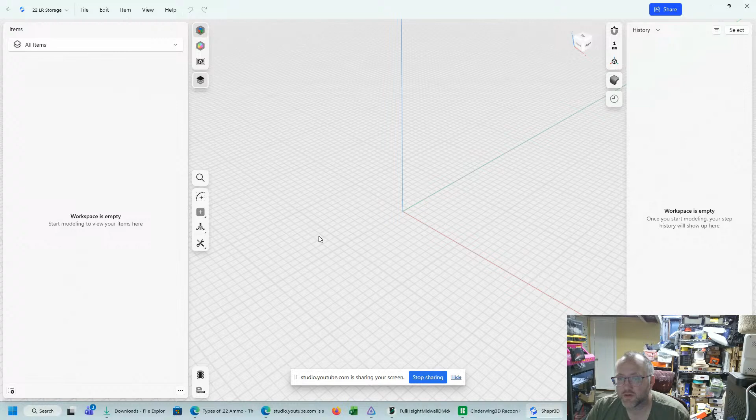Storage. Okay, so first things first, we want to be on the top. I tend to be on the top when I work on things like this. So I have an X and Y right here. Do a sketch. We want to do a rectangle, because why not? 40 by, let's do 40 by 40.

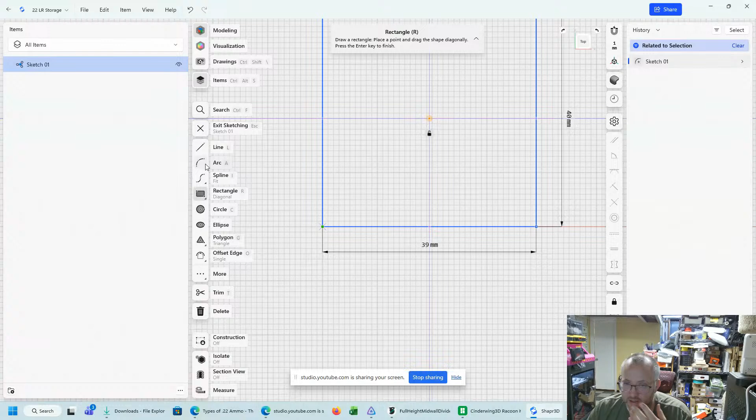Nice little square. Now, because we want to have this work for a case, right, we need to put some additional widths here. That way we can set the extrusion at different heights. So I did a 40 by 40, but it's not going to be a 40 by 40, right? So, come on, 40... 40. Okay, see if you get that out.

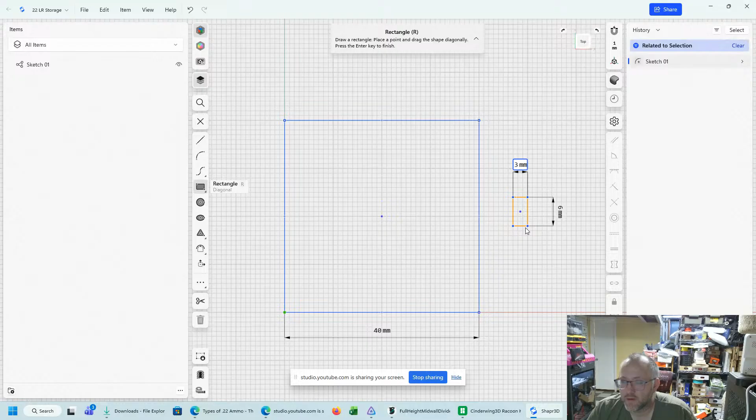So what we're going to do is we're going to then offset this, because that is going to make it easier for what we're doing. So offset edge, right? We're going to select the edge here, and we're going to do about 3 millimeter. And we offset this edge, and that's going to be 3 millimeter. And offset this edge, like that, 3 millimeter. Right, now we've got this done.

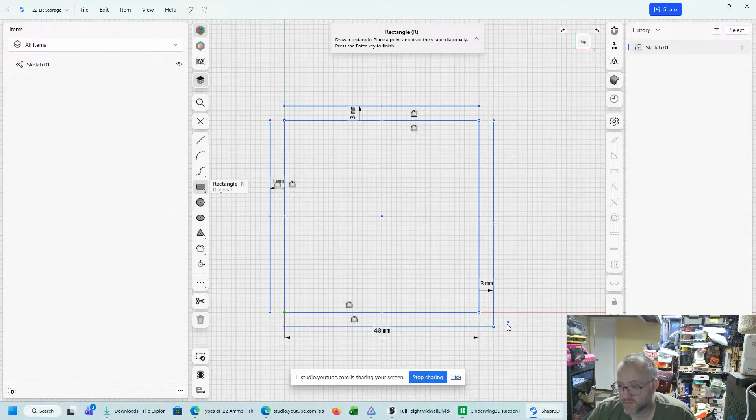Now I could either stretch this and connect them, or I could just make another rectangle. To be honest, that's probably the easiest thing to do, is just do it in a rectangle. So now we have a box within a box. So we can 3 millimeter box, pretty sturdy, have a flat, and then we can extrude it.

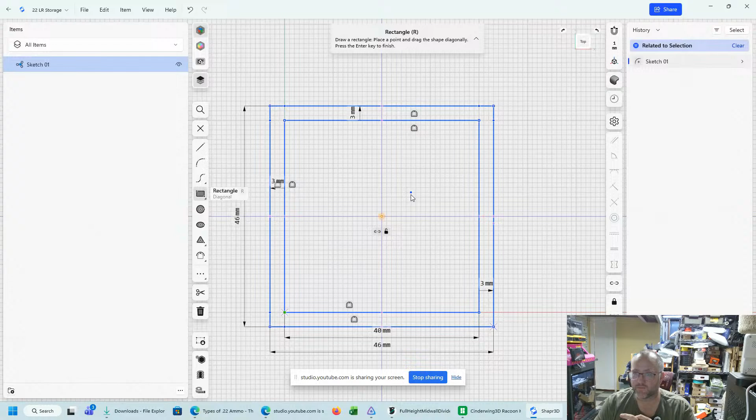Now, because we want this to be a box within a box, right, this is where it gets fun. We probably want to have some sort of box inside that. We want to offset that edge by 1. Okay, so now we have the thicknesses here. Why is this important? Well, now we can make the box here.

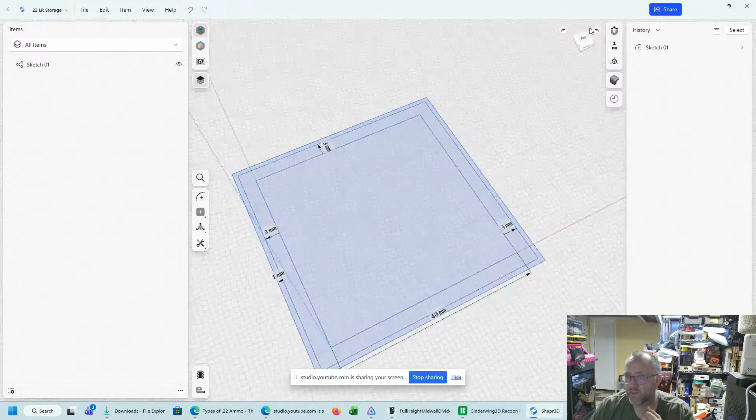We're going to lift this one up, say 3. Now we're going to lift this up, say, I don't know — how tall are the rounds again? Go back to our research here. The overall length is... an inch should work fine.

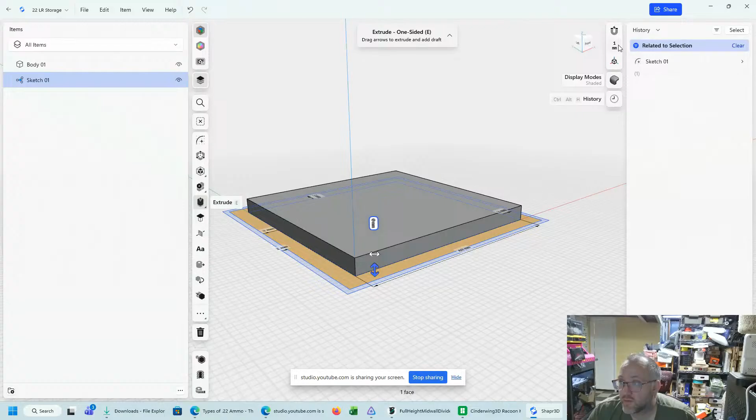So we can switch our measurements to inch, make it a little easier. And we go 0.75. Alright, you see that now? And now we have this other one where we can go 2 inches.

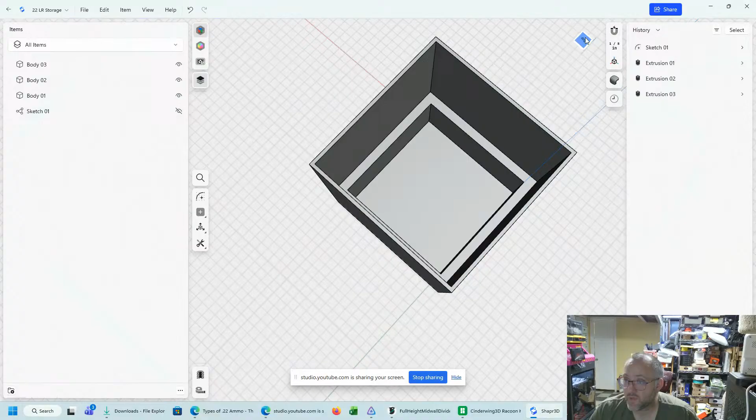So now, see what we got going on here? Now we have a case within a case, right? Isn't that nice? So we're going to turn these off because we want to see the sketch.

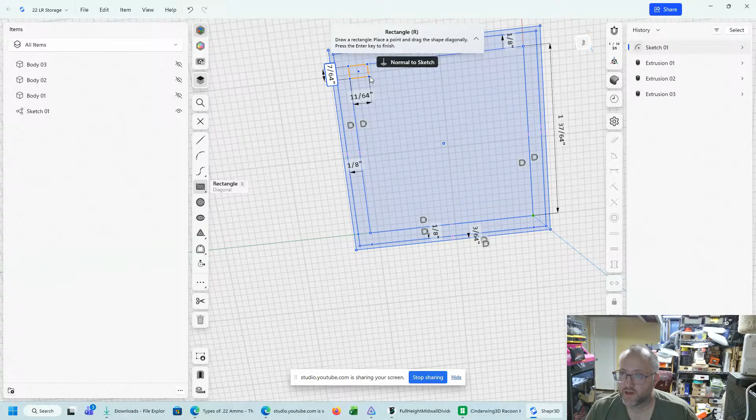So now we want squares, because these are squares and they're 0.22 inch, right? But you got to keep in mind you need a thickness. So if I do here and I do something like this, but I want to see this in decimals, okay, so that's not big enough, right?

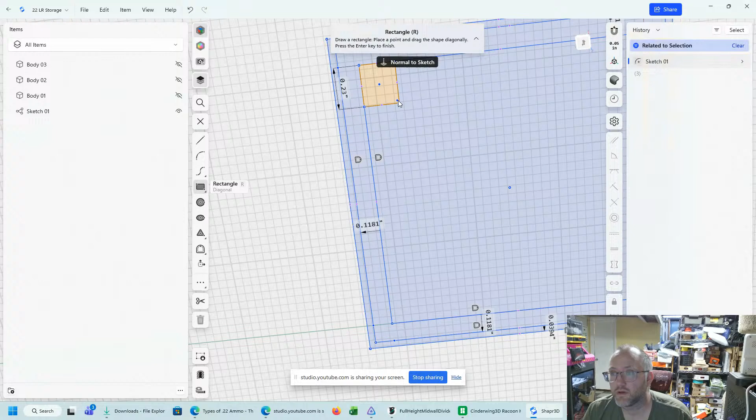So this has to be about 0.23. Why do we say that? Because that's how thick we need it for it to be anything. So because we actually need it a little wider, let's say 0.26, so we got 0.03 for thickness of that wall.

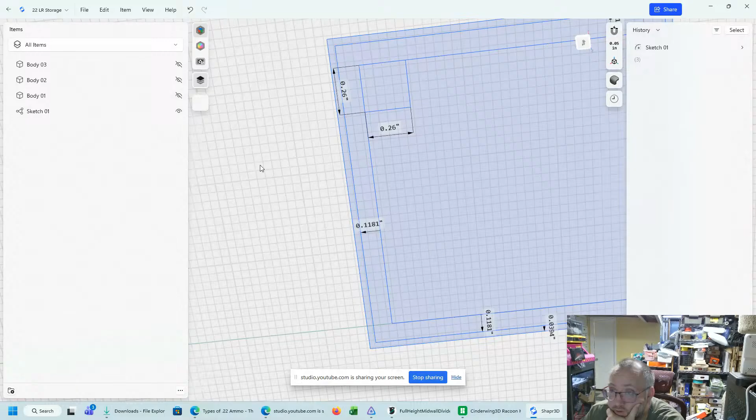Okay, so now we're going to do that offset command again. We have commanded here, you can see, we're going to do a little offset. Nope, not offset face, we want to offset the lines. So we go back to offset edge. We check that we wanted to chain, and we want to do this.

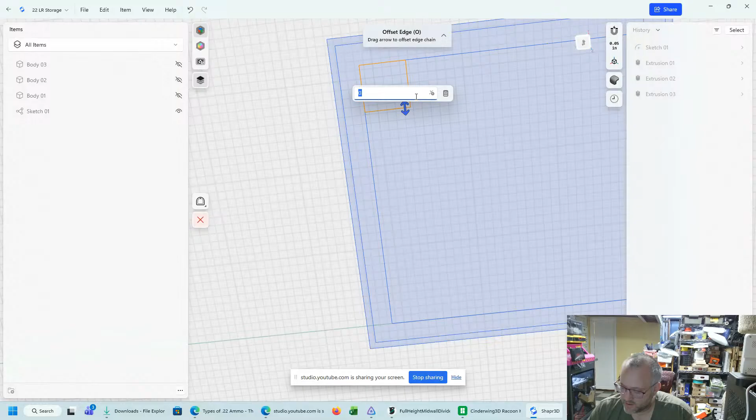So we want to go inside 0.03. Oh no, negative, it has to be negative. Negative 0.03. Now we have a box in a box, which is great.

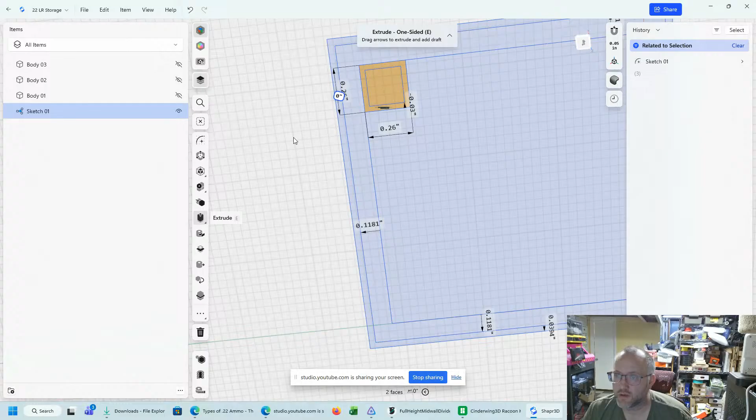Because now we've got this shape, and we got this shape, and we're going to go ahead and we're going to lift this. Okay, so we already have this base here.

So we want that to be, switch this back to millimeters because I'm just a millimeter person. We want that to be about 4 millimeters. Switch this back to inches because we have the dimensions in inches. If the overall length is 0.695, right?

Well, you don't want to have to pull everything out. So you're looking at being able to pull this sucker up, so we can make shorts or we can make long. I'm doing a rifle, so I want the 88.

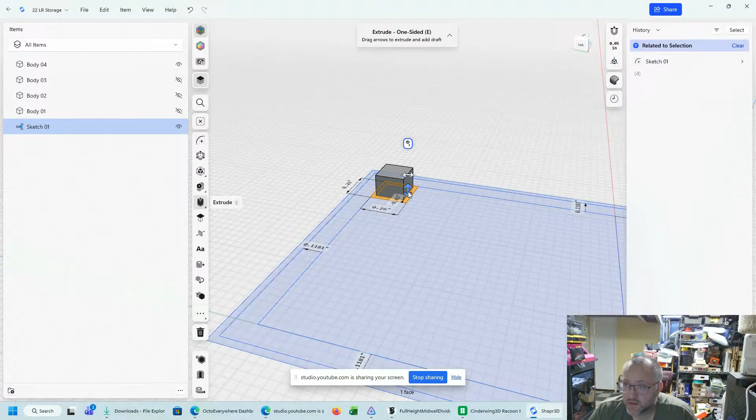So let's say we want to put it at 0.8 so that it sticks out a bit. So this is how you do it from your design. You just keep going. So you click on this guy, and we want that to be 0.8. Alright, so you can see now we've made a nice little box inside of a box.

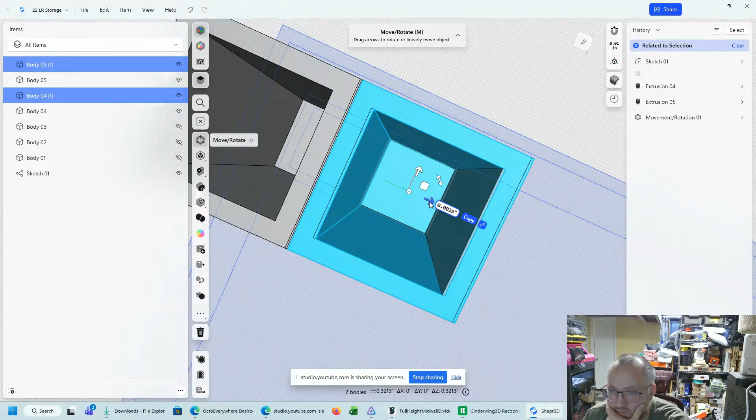Alright, now watch the fun parts. So we're going to select this, and now what we're going to do is copy it. And then we're going to move it over, make sure it touches. See that? Just make sure it touches. Okay, yeah, that's good, right?

Now we're going to copy these, copy them, and then we're going to move them, drag them over. Drag them over just a hair like that, right? Yeah, that's pretty good. Now I'm going to click off of it.

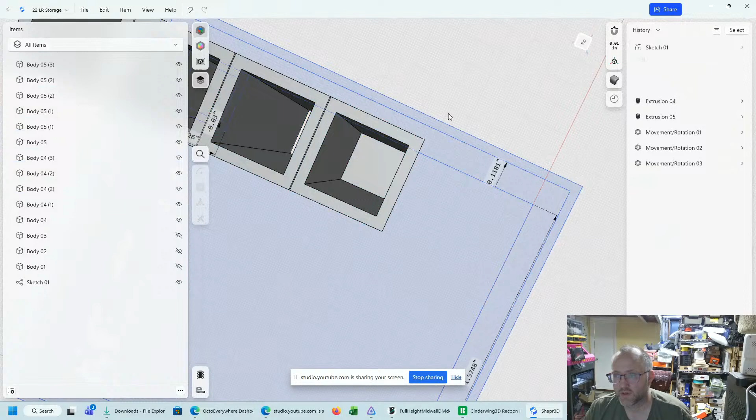Now we're going to do this one, then this one, this one, and this one. Oh, see what we got there? We want this one and this one. No, we want this one, this one, this one.

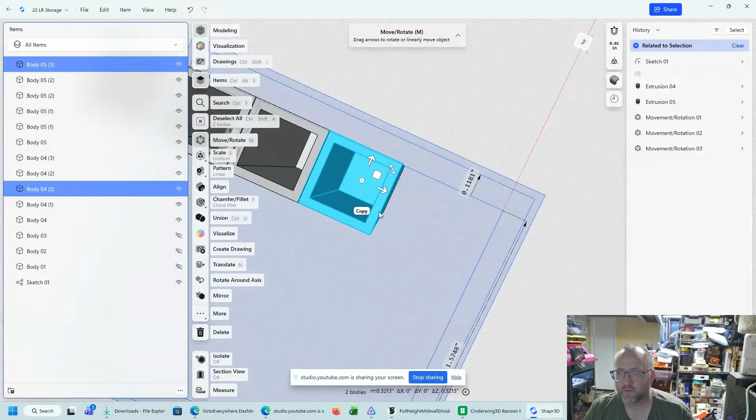Okay, select it, we want to select this. It's a face, so we want the body here, and we want this body, right? We want to copy that one because I'm not really sure I can get that fourth one in there. I can't.

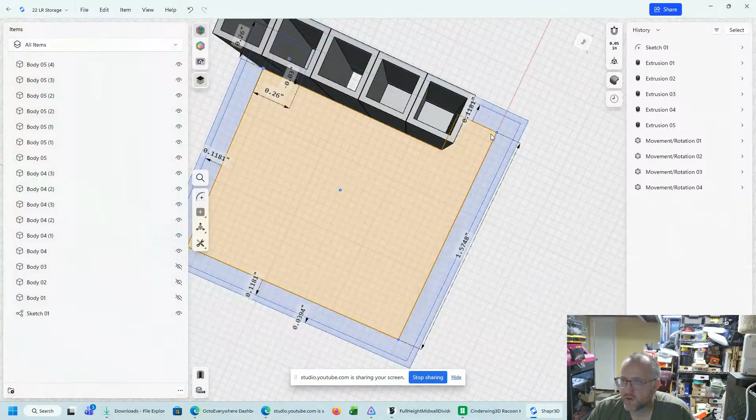But never fear, we will adjust our measurements here. So instead of a 40 by 40, like we had, because we had these guys on, right? They're very straightforward to fix, right? So it's going to shape like this, right?

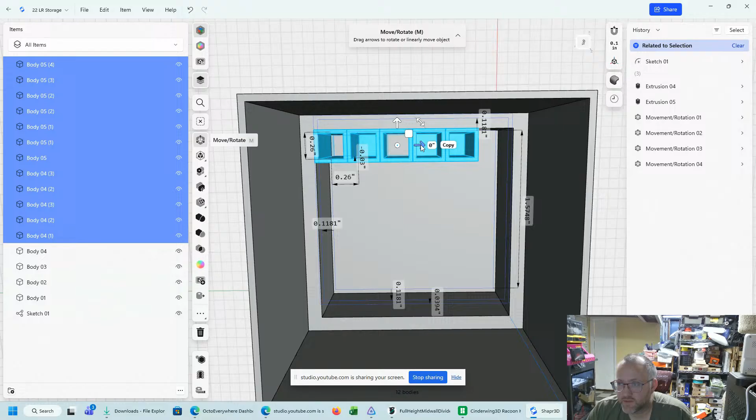You can see that, it looks pretty good. Alright, well let's see here. If I select all these and I move them to the center, right? Now I can just move this out a bit. And ideally, this free forming, so, you know, just going to make it a little more structure to the thing, that's all.

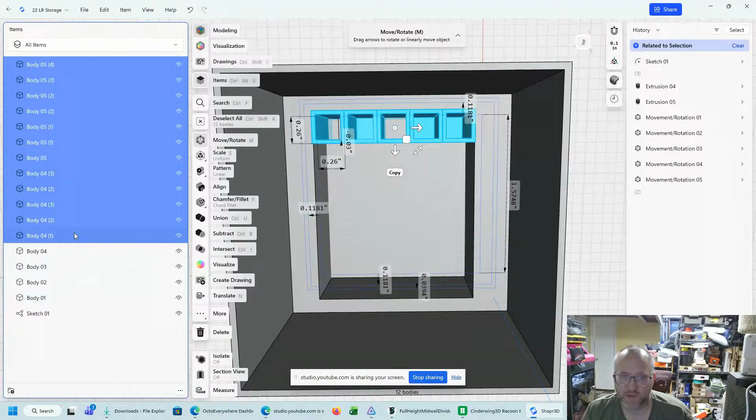Okay, so now we have that, and we're going to select all these objects, and then we're going to, oh, we're missing one. Are we missing one?

Oh, we were missing one. Let's see what's going on here. That box can go away, we don't need that one either. So let's find out where that little box came from.

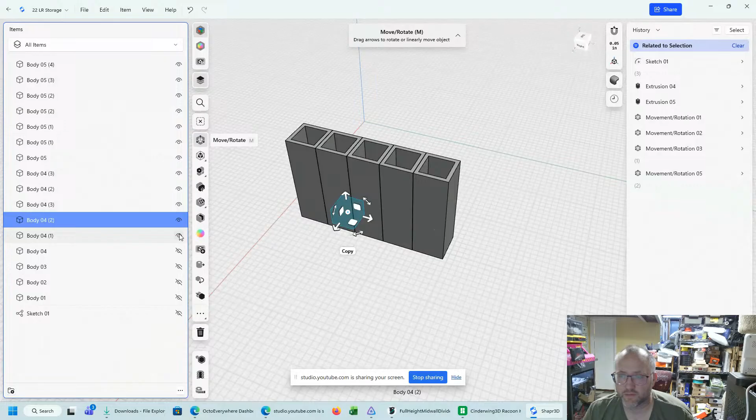Ah, there it goes. Okay, we're going to select these and make them into a folder. And rename this as round boxes, row 1.

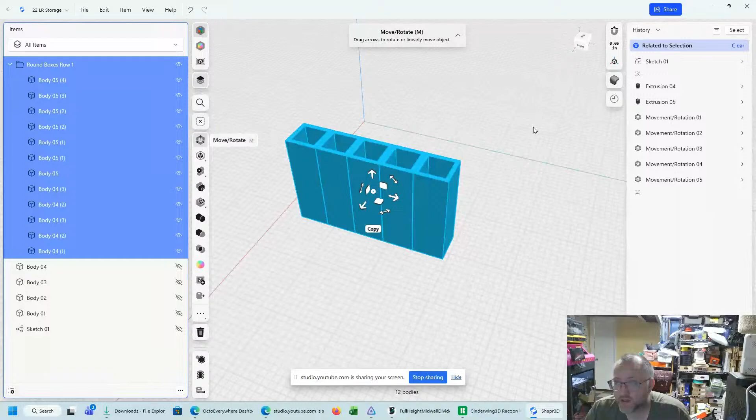Okay, so now I can select round boxes row 1. Turn on my lovely device here. Still select round boxes row 1, copy it, and check that it fits.

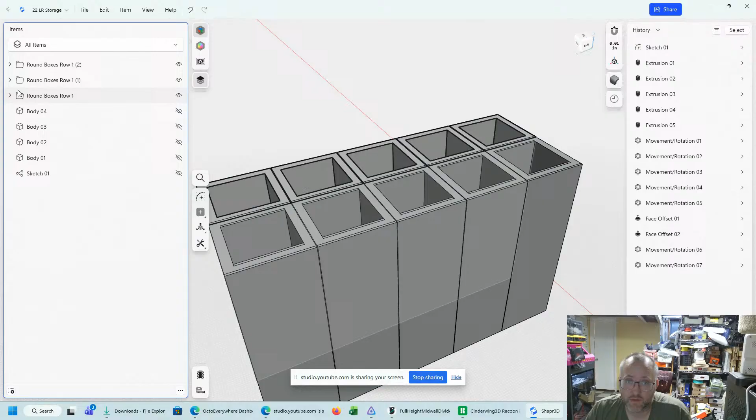A little overlap's okay for what we're doing. Right? Now we got round boxes two. Not really sure what's going on here, it's a little strange, but okay. Maybe they're making my structure a little more complex than it needs to be, but that happens.

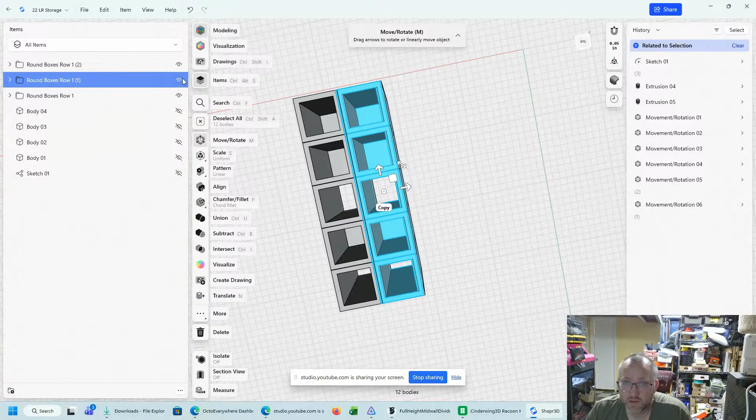So I turn this one off, and then I turn this one off, and turn this one on. Look what we got going on here. We got something going on here. Oh see, we had an extra round, somehow it copied twice.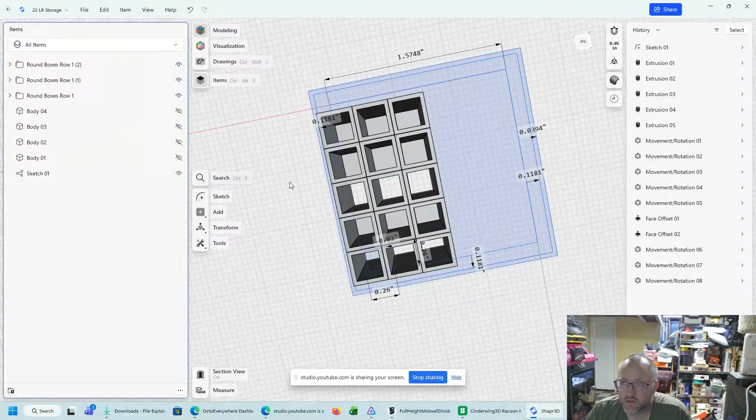That's okay, we can live with that, right? We now have 3 rounds. Now we're going to select all 3, copy them, and move them over like this, just a hair bit. You just want the hair covered.

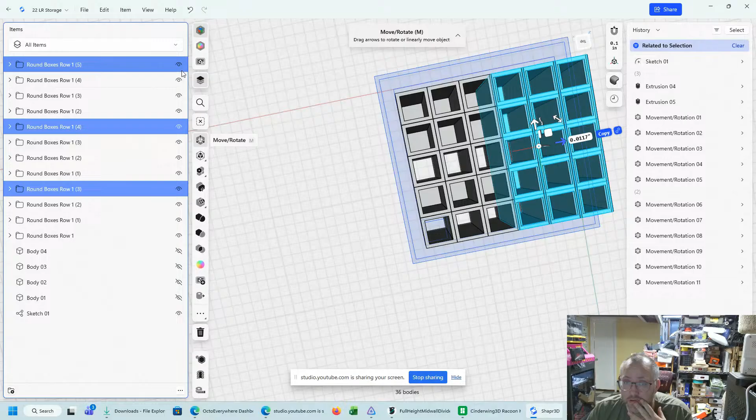Okay, and we're going to go ahead and turn one of these off. So this round goes off. Well, we got multiple copies going on here. I don't understand, but it's some weirdness going on.

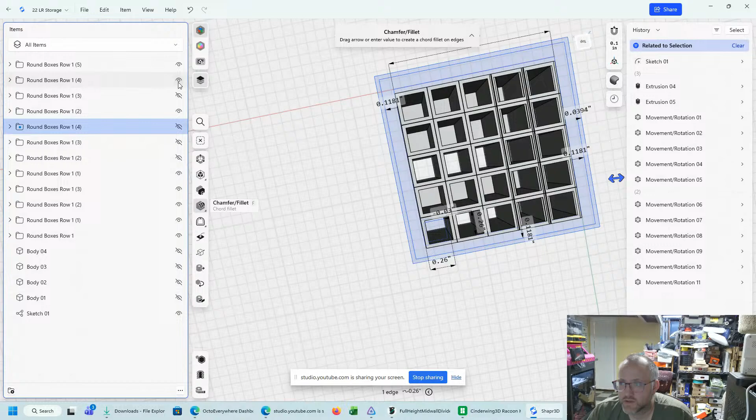Okay, so we need that one. You can see there's some weird effects going on here, like it's copying a copy of a copy.

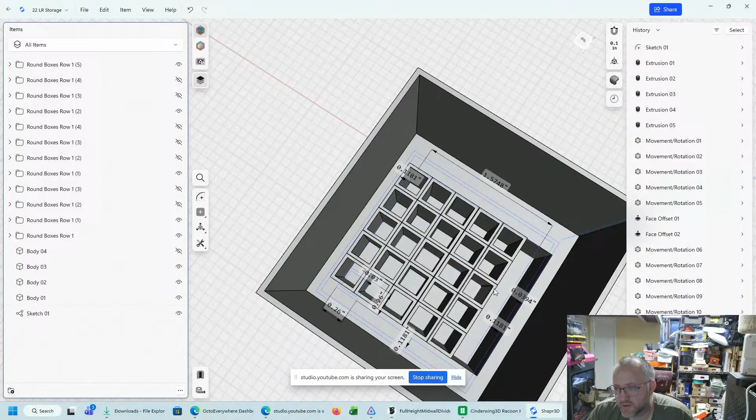Okay, let's see, that looks about right. Now keep in mind we already have the box down here, and this box. So since we don't need these two by copying them by accident, delete them, clean them up.

Zoom out here, doesn't look like we need that shape. These shapes we don't need. So let's factor out the copy, simplify this model as much as we can.

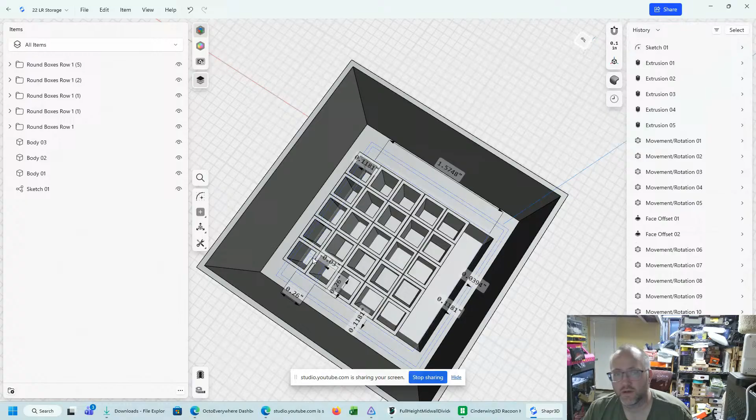Okay, so we now have these row boxes, we're just going to move them a little bit over. Right? And then we're going to do the same thing we did to the other part of the structure. All right, same thing here.

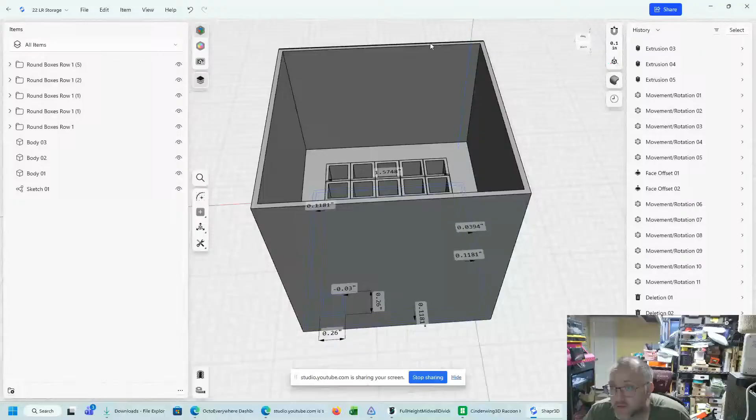Okay, all right, now we have this shape. So this can go down a bit. So we now have a round holder. Now we don't have a lid for it, but we were about to solve that.

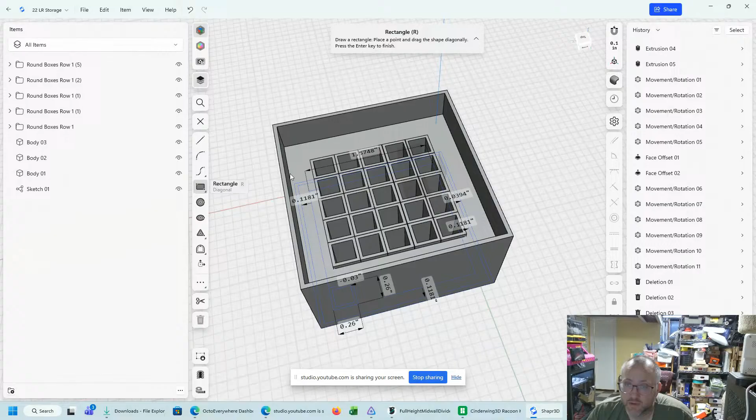So we do a sketch again, we connect here with - oh, we gotta make sure we're on top. Undo what we just did. Make sure we're on top, otherwise it won't work so well. Make sure we have rectangle. Make sure we're right here.

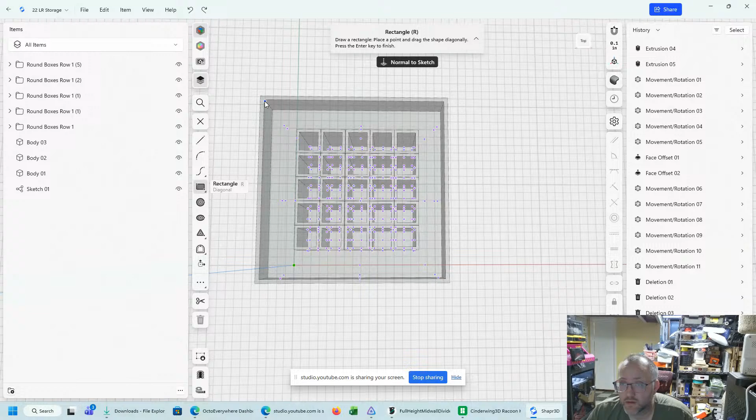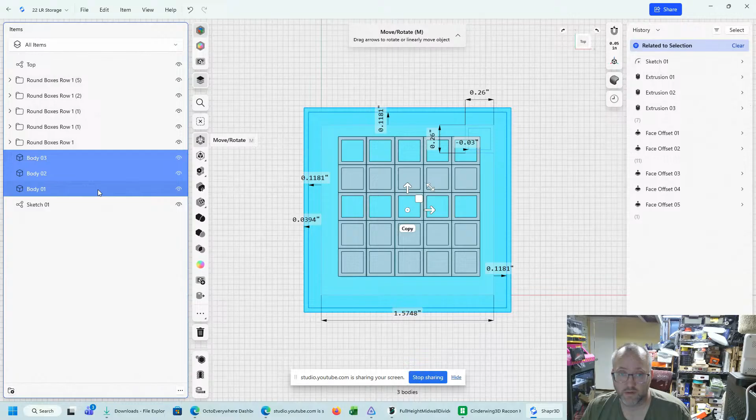Right, and these are all a shape, we're going to call this box. These all get put in a folder, and we're going to call these box too. Okay, so we can turn box off, and we can turn these rows off.

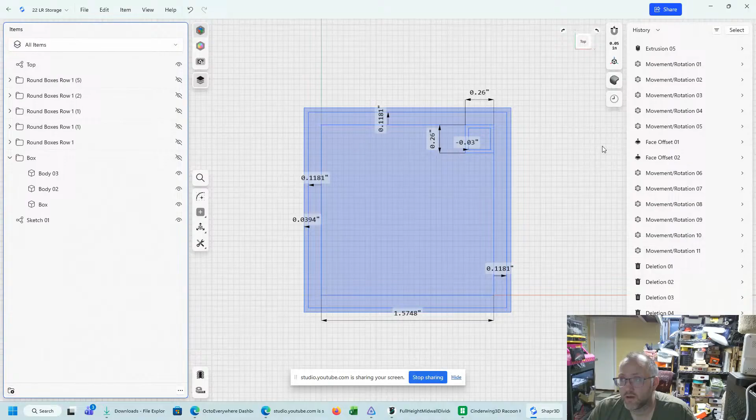Okay, so here's the issue. We look at box, right? We need a way for this to have a lid, right? So ideally I would like to have a shape that is inside this so that when you are using it, right...

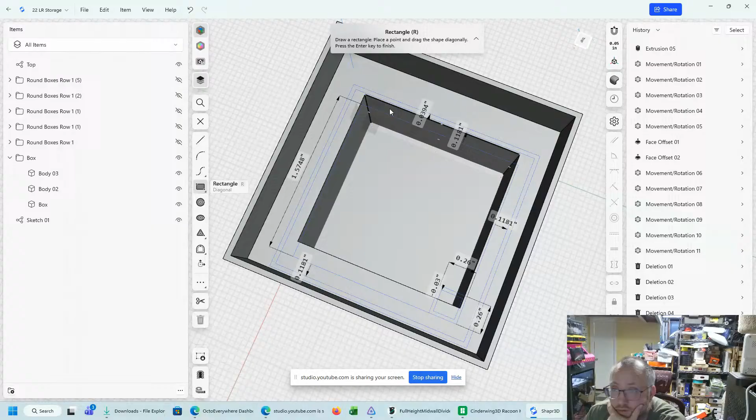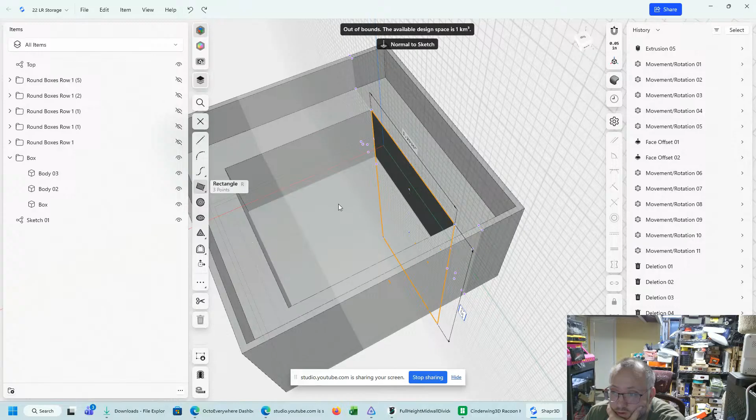3 points, 1, 2. I wish it would let me actually do what I wanted to do instead of being a pain about it. Okay, we want to go here, and we want to go here, and we want to go - well, what the heck is that?

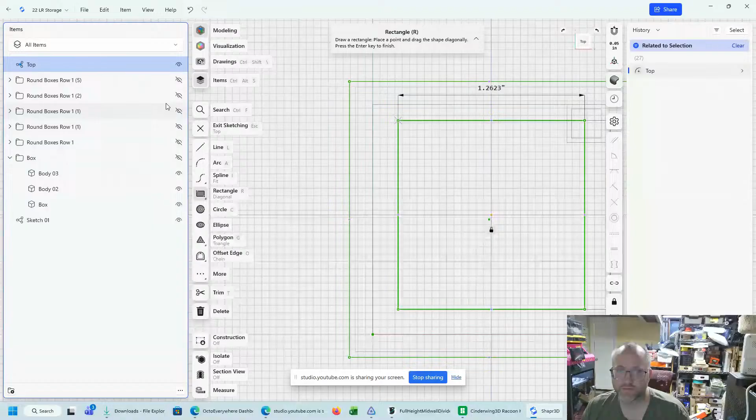Here, and we want to go here. Right, and we want these two shapes. So we turn off everything else. All the other shapes are off, right? We finish our shape, turn off original sketch.

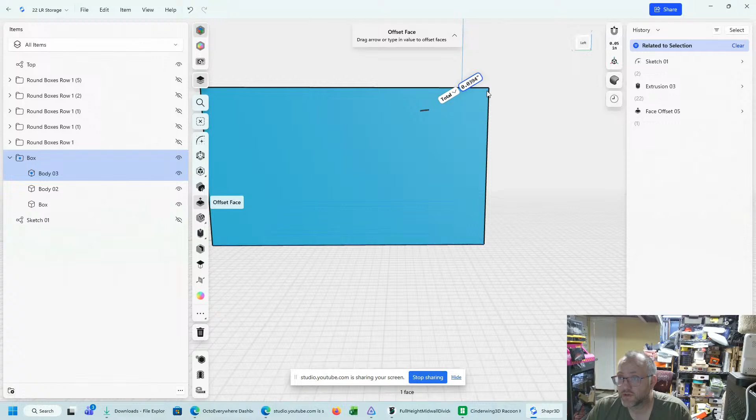Okay, so what we're going to do here, do we know how tall it is? Let's turn on our shape again, let's look how tall it is. So we want to know.

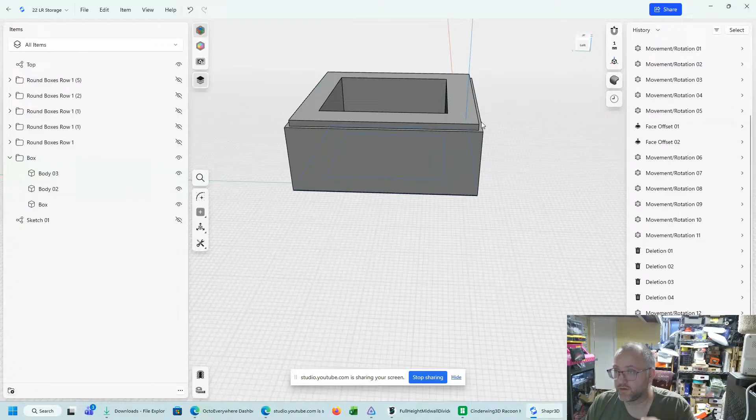It's 1.0781. Okay, let's see what that is in millimeters, probably easier - 27.4. Okay, let's just do 27.5 millimeters. Oh whoops. No, that would actually work better, but okay, for what I'm doing here is 27.5.

Okay, so we go back here, we turn off our box. Now what we want to do here is all this we want to move. Right, we want to move it up 27.5. Perfect, right?

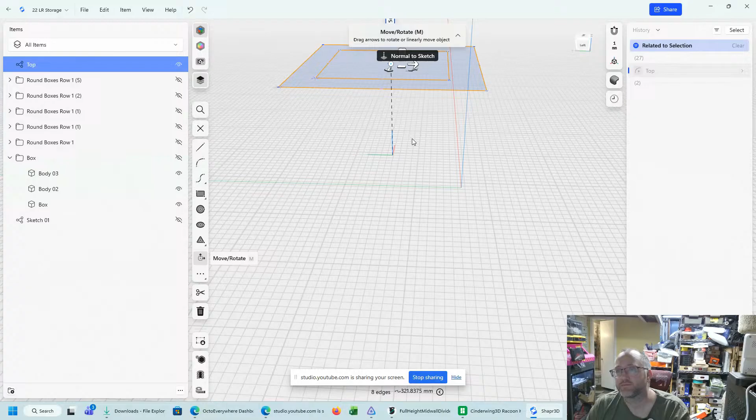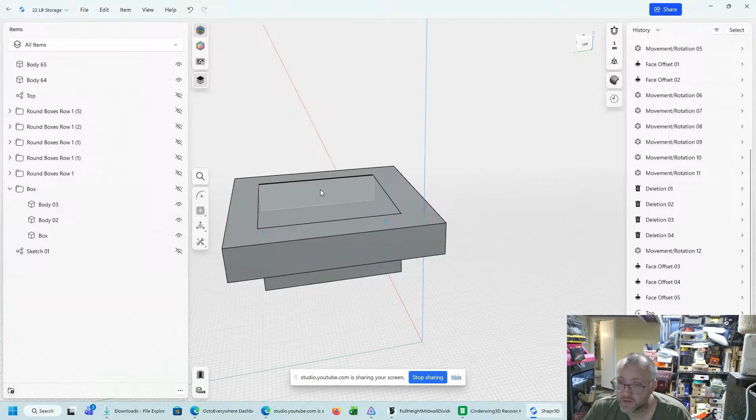Now we want to go have this one go down, so we put it as a negative, say -8. And this one we want it to go up, so say +8. Now we also want this to go total of 16, right? So now it's all one shape.

So let's go ahead and turn that box back on. Oh, we got a box with a lid. Isn't that cool? So now it should fit.

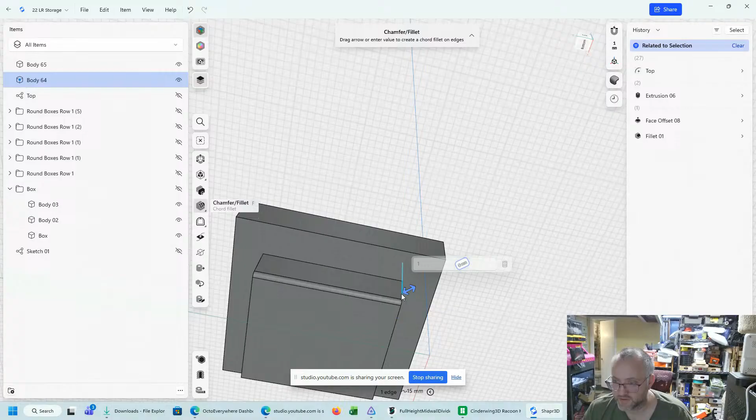Now let's not be hasty here, we need to make sure we make this very nicely fitting. So we chamfer, I do a nice little one chamfer on all the things. That's my personal preference, you can do whatever you'd like, but basically I just choose one. The purpose of this is to make sure they're not tight fittings, and if you have elephant's feet or whatever, it'll fit nice and easy, right?

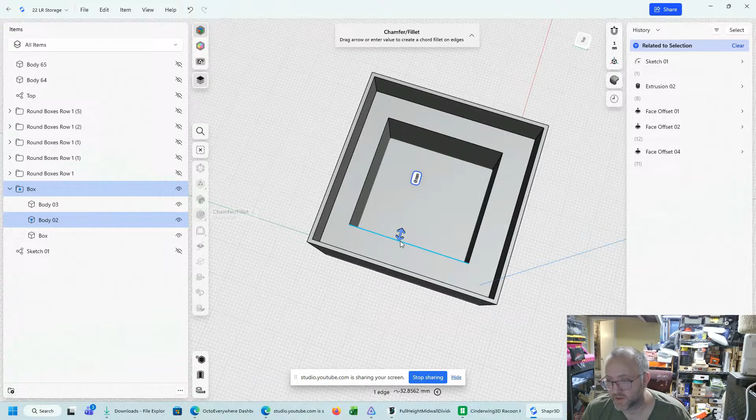Give it some space. So we have these bodies, we're now going to turn this off and now turn on the other bodies. We can leave the outside the way it is, but again, we put the one chamfer here, one chamfer here, one chamfer here, and one chamfer here. Same thing here. One, one. Because you don't want to have sharp edges when you stick your finger in there, right?

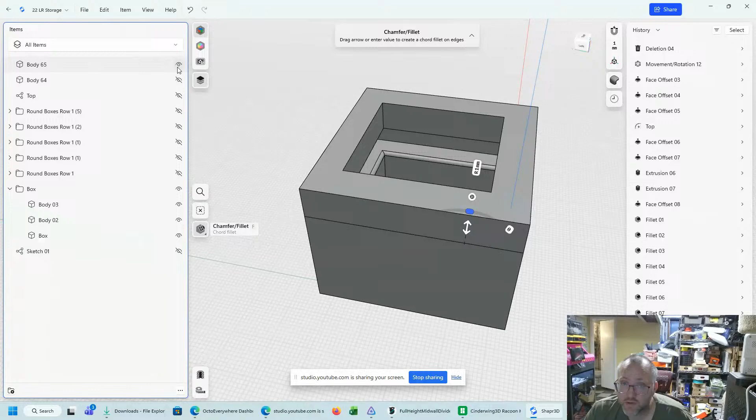Okay, so now we have a box with a lid that we can put in here. I'm going to put this one in here. You can see how that fits in there. Fits pretty snugly. It looks like the box is a little shallow, but that's okay. It actually fits inside, right?

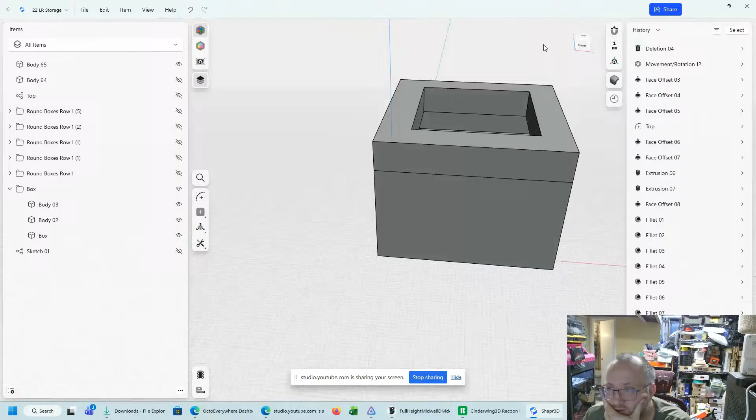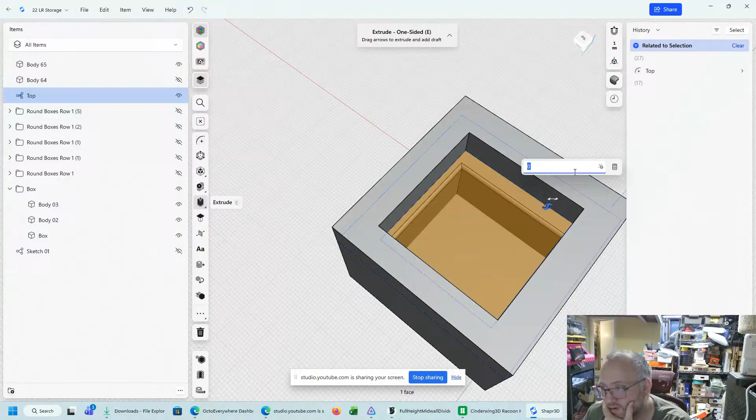So if you turn that one off, look here, you'll see it fits here as a flat edge. Now what we were looking for is it to sit inside so that the entire shape works, right? Well, what we're going to do here to make sure it's a snug fit is we're going to take this off, and we're going to lift this up about 6 more millimeters. Now, that seems to have been too much.

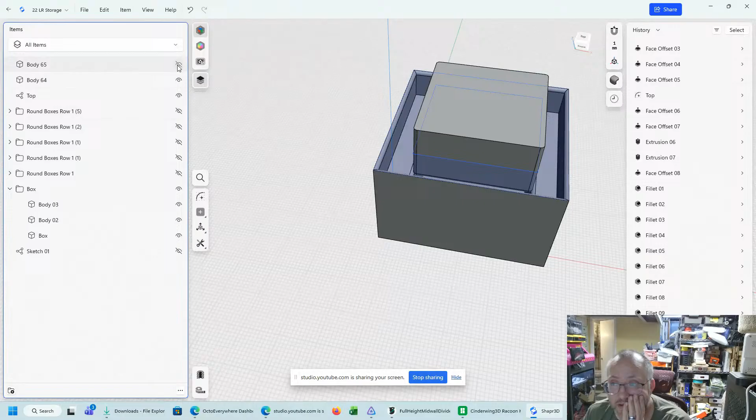And it's possible. Okay, so we take the lid off, right? So we look at these shapes and say, oh, okay. This shape here, it does look like we can turn off, because I don't think we need this shape. I'm going to delete it. Turn this one back on. Turn this one on. Okay, so they all fit nicely, nice and snug together here.

There's a little bit of a gap here, which is interesting. Since we're going to break it, it's not so big a deal. If I can get it to home, we'll get it to home. All right, I'm just trying to zoom out. There we go.

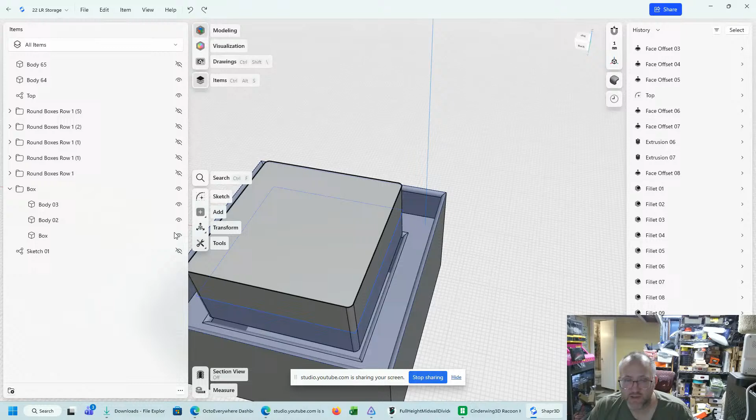Sorry about that. Okay, so you can see there, it's not fitting as snugly as I like. So we're going to turn this off. Look here, let's see what we got going on here. All right, so I suggested this also. So we're turning these sketches off.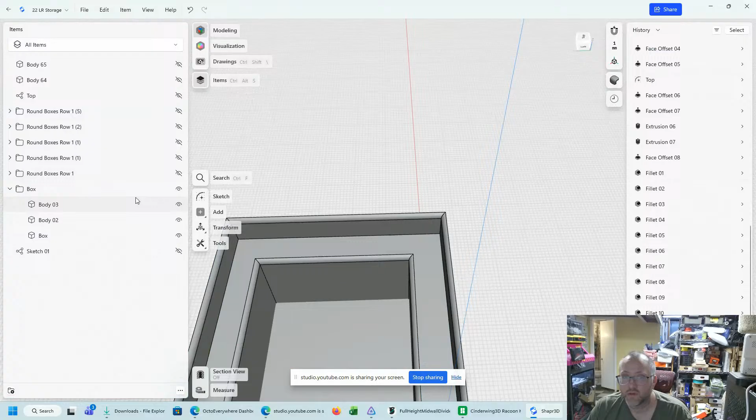So we don't have any issues there, right? So we want this to go to 21. So if we put the shape in there, does that fit inside? It does look like it's fitting inside, doesn't it? Good. And now we turn the lid on. We now know that there's a lid. And that's perfect.

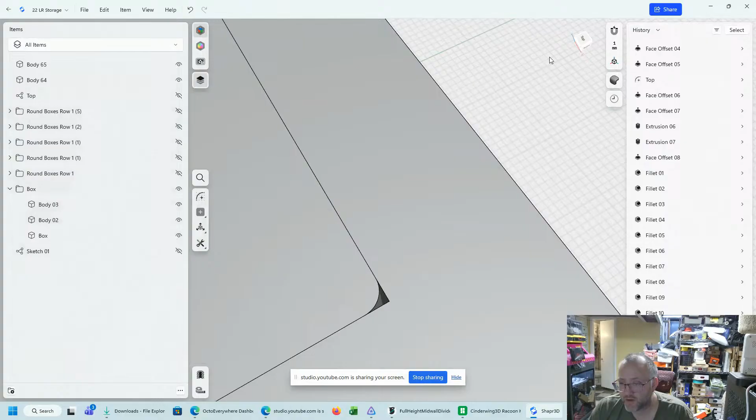Now it's got a little shape issue here. So we're going to figure out how we're going to make that. That could work, could be a little air hole, but more than likely we don't want it to do that. But for this exercise, it's close enough.

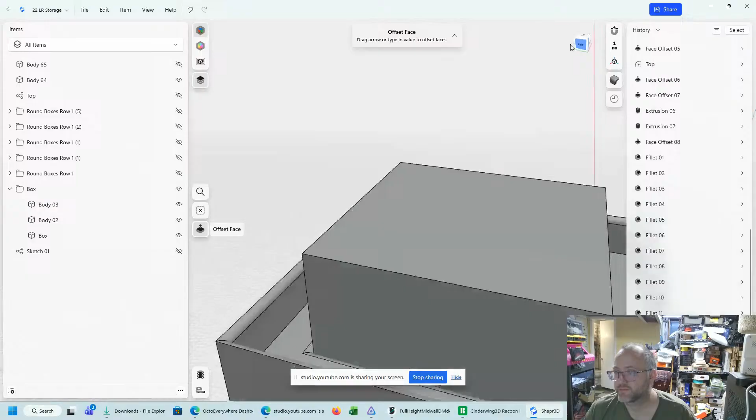I got to figure out how to clean that up because I chamfered it. Basically, what you can do if you need to unchamfer something is to go in here and go to 0. See that? And now, even though I wanted it chamfered, it's probably not a good idea, since I wanted the shape when I print it to be solid. But I can run it off.

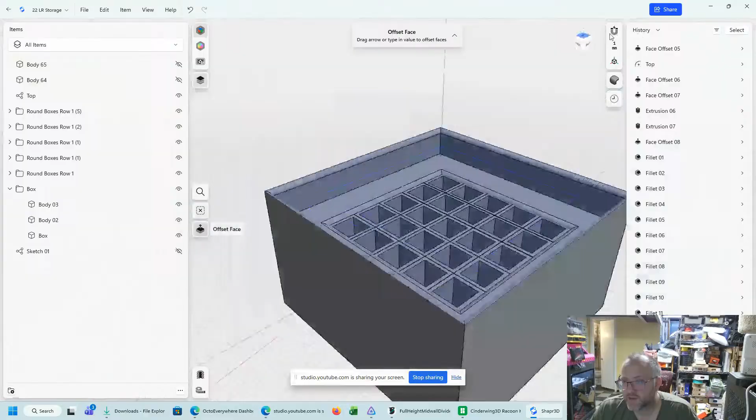Okay, so now we have this lovely little box that we can use to store 22 rounds in. Nice little stackable box, and it looks like it'll fit. So it's kind of a cool little design. I hope you all like it. You see it's a 1, 2, 3, 4, 5 by 1, 2, 3, 4, 5. So it holds 25 rounds. You can see it's a little funky in the bottom. It's more likely the shape than anything else.

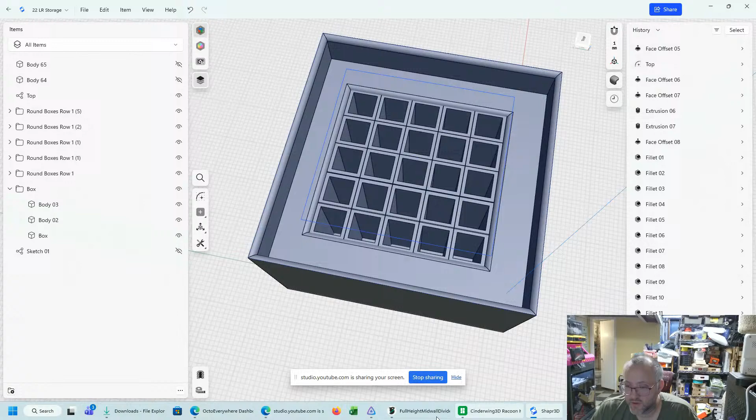So it's going to be a fun little design. Thank you for being here, I hope you enjoyed the video. And we'll go from here.

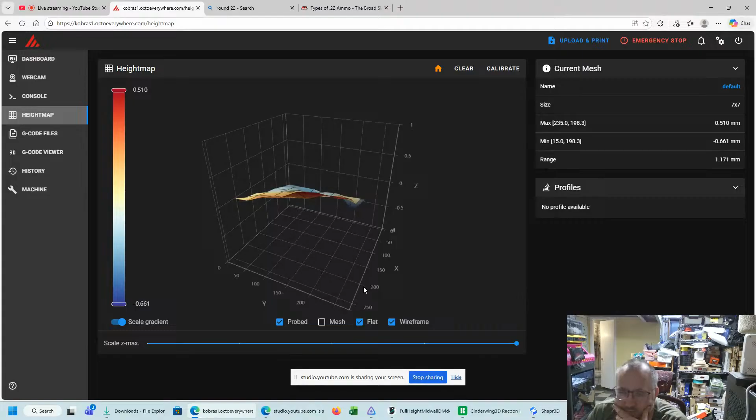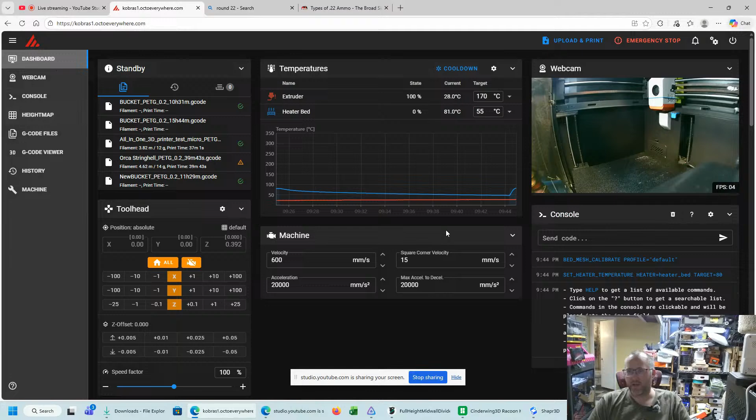Got some weird little shapes. It's pretty close range, but it may be easier if I unscrew the screws and let it set once it's hot, which is what I'm going to do. So right now I'm going to go ahead and hit calibrate, see what it's at right now. You can see the bed's already up to 80. So we're going to let it do its thing and I'll come back to it.